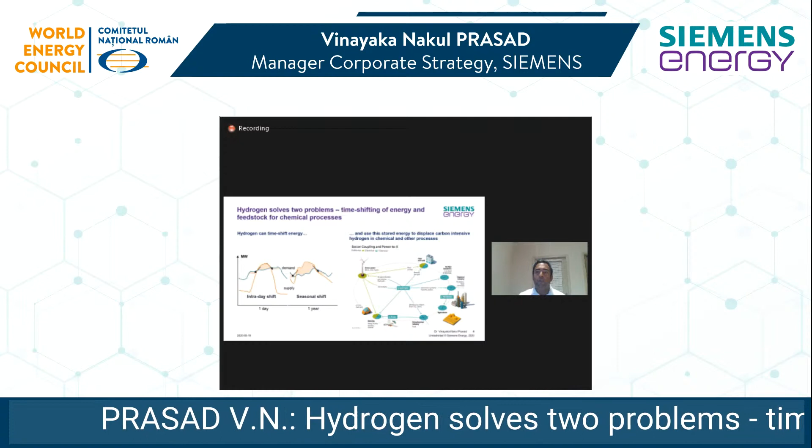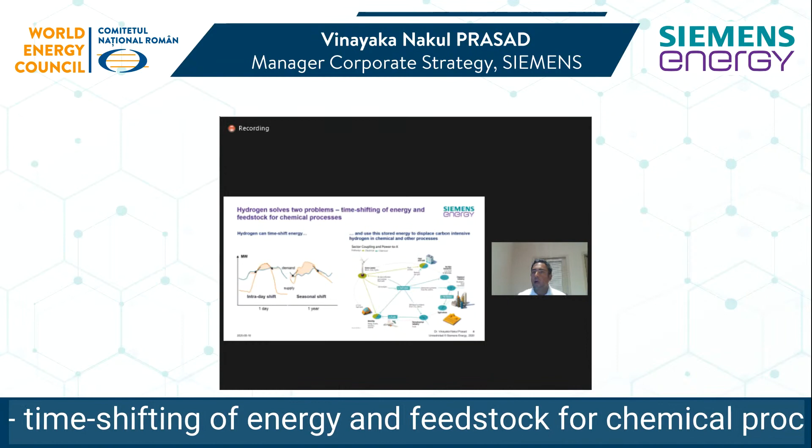And the second one is it is already a feedstock to many industrial processes. So if you look at the fertilizer industry, it's a key ingredient to produce ammonia and then ultimately fertilizers. In the oil and gas sector, it's very important to remove sulfur, for instance. And in fact, these two industries combined are the largest consumers of hydrogen. But hydrogen can also be used in heat. If we blend it with natural gas, we can use the existing grids to power furnaces, for instance, or home boilers.

Depending on the levels, of course, and the safety margins. It's used in the food industry, in the beverage industry as well. And it's starting to gain traction, and that was mentioned by the minister as well, in the mobility sector as well. So we see especially heavy-duty trucks being equipped with fuel cells now.

And we will see, and I'll talk about this a bit more later, enhanced use, I'm pretty certain, in transport, and it does not have to be only in pure form, like in fuel cells, but it could be in the form of a synthetic hydrocarbon. So if we take an external source of CO2, for instance, through direct air capture and combine it again with hydrogen, which is produced from renewables, we have this net zero hydrocarbon fuel. So we could have kerosene, for instance, methanol, and any kind of flavor.

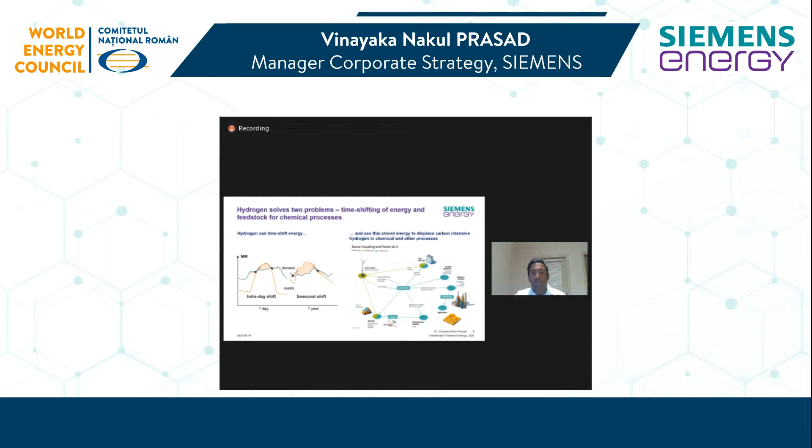And in fact, in Germany, there's a big project now coming online where 7 refineries are combining to produce large-scale hydrogen from stranded offshore wind. So that is gigawatt scale offshore wind by the North Sea, converted into hydrogen. And this is going to be then converted into kerosene used in the Hamburg airport as a transportation fuel to meet future transportation regulations. So that's just one example of how we see hydrogen unfolding, really.

And as a result, we join the chorus of different market outlooks, and particularly since it has a sector coupling capability, we believe also that the outlook from today's close to 80 million tons to close to 550 million tons by 2050 in the more optimistic scenario is something which is definitely going to happen.

Looking at the production again, the problem with the hydrogen produced today is that it's very CO2 intensive because it's using natural gas as a basis or even coal. So 95% is what we call gray hydrogen. That's taking steam methane reforming and emitting a lot of CO2. The International Energy Agency estimates about 830 million tons of CO2 emissions from hydrogen production alone per year. It may not sound that much given the close to 35 gigatons we emit every year, but this is the combined emissions of Indonesia and Great Britain, so quite substantial.

But in the future, and it's highlighted by these rainbow colors, and I'm going to talk more about the colors later on, we expect this to be more carbon-free. So we see blue hydrogen, which is a combination of gray and carbon capture, and a lot of green hydrogen from renewable energy sources. So it's going to be a mix, and it has to be a mix, really, to achieve our decarbonization targets.

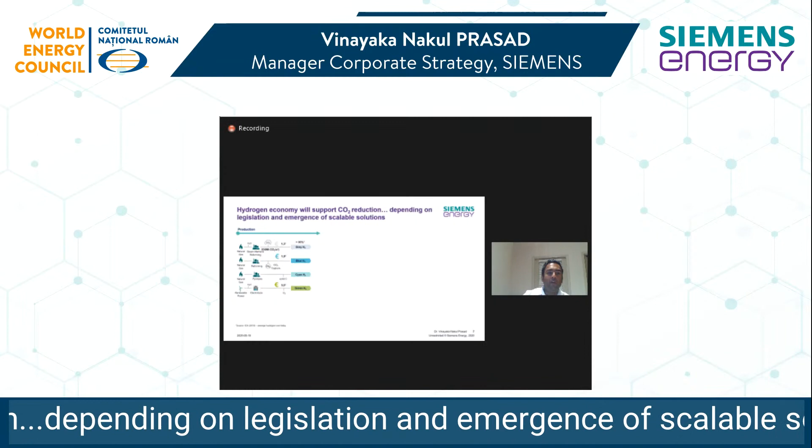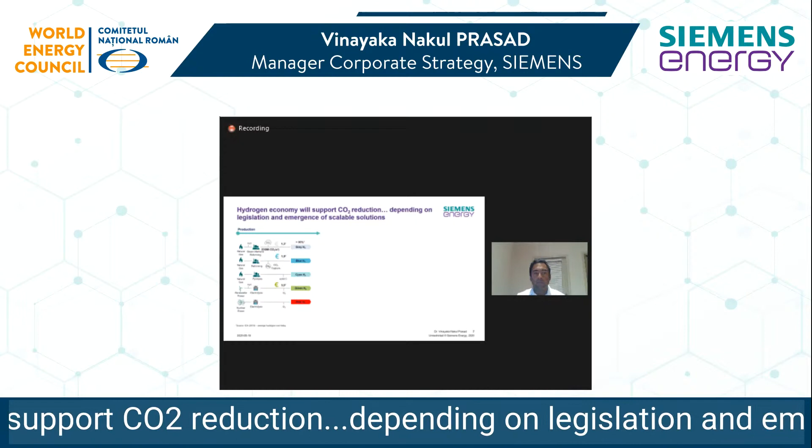We spoke about green hydrogen. Unfortunately, from a price point, on average, it's very expensive, and I'll dive a bit deeper into this price aspect later on. Another way of using electrolysis is combining with nuclear. I did a bit of research, and if it's correct, I think Romania has about 20% nuclear energy, so that is also a way to have low-cost hydrogen at larger scales. In the US, for example, a lot of nuclear plants are at risk of being stranded, so that's another opportunity to convert these nuclear power plants into large-scale, giga-scale factories of ammonia, for instance, really giving it a second life.

And finally, hydrogen has also been appearing as a waste. A lot of industrial processes in refineries, steel mills, for instance, have been emitting hydrogen along with other constituents like CO, so it's a syngas. There's two options: either you flare it, which of course is very environmentally unfriendly, or you can actually reconvert it into power. Gas turbines have been doing that quite successfully, even with higher hydrogen contents, up to 50, 60%, in the past. So you're thus converting this waste into energy, and it can be both power as well as heat.

Sorry, it's kind of taking its own life here, and converting it into heat. So really utilizing it and minimizing the CO2 footprint.

In terms of transportation, that is also a big question mark. And I think the minister mentioned initially that we need to look across the entire value chain. So it's not only production, but also how to get hydrogen from A to B. And there are various options.

We can blend it in pipelines, for instance. That could be a straightforward way. It requires a bit of upgrades of the pipelines. Because of safety issues, hydrogen is a very light element, so we have to make sure the sealings are correct. It can cause embrittlement, so the material needs to be stainless steel. But if it's done properly, this could be a very good way of using today's asset.

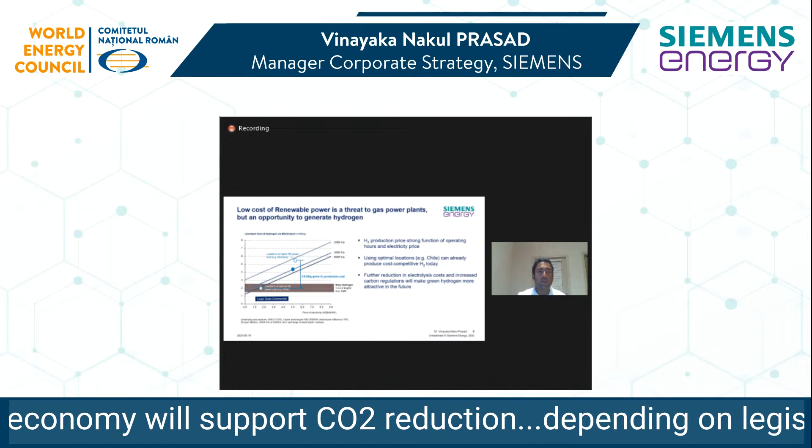So just a bit about economics. Apologies, it's probably a busy graph, but it shows where we are, where we're heading, and where the opportunities are for green hydrogen. The x-axis shows the price of electricity, in this case US cents per kilowatt hour. On the y-axis, we show the cost of production of hydrogen per kilogram using electrolysis.

And this gray bar shows the reference range for gray hydrogen, using natural gas and steam methane reforming. Depending on the prices, there's a variation, but that's your benchmark price of about $1.5 to $2.5 per kilogram hydrogen produced.

Now, this plot shows a couple of sensitivities. Of course, electricity prices are very, very important. So if we want to use green hydrogen, we need to ensure access to low-cost renewable energies, ideally free energy, especially when you curtail. And this is not always given. Particularly in Germany, there was an issue with the feed-in tariffs, so that electrolyzers essentially had to pay a premium for renewable energy, which is kind of counteracting the whole system. So ideally, you want to have free electricity. Typically, 60% of your production costs are down to electricity costs.

The other factor is the operating hours of your electrolyzer. You want to maximize your capacity, your running hours with the electrolyzer to really lower your overall life cycle costs. So the different curves here for 2,000, 4,000, and 6,000 hours show how it shifts down. And it's pretty intuitive, because the more you maximize your operating hours, the quicker you amortize your capital costs, which are still fairly high since we're at the beginning of the development curve for electrolyzers.

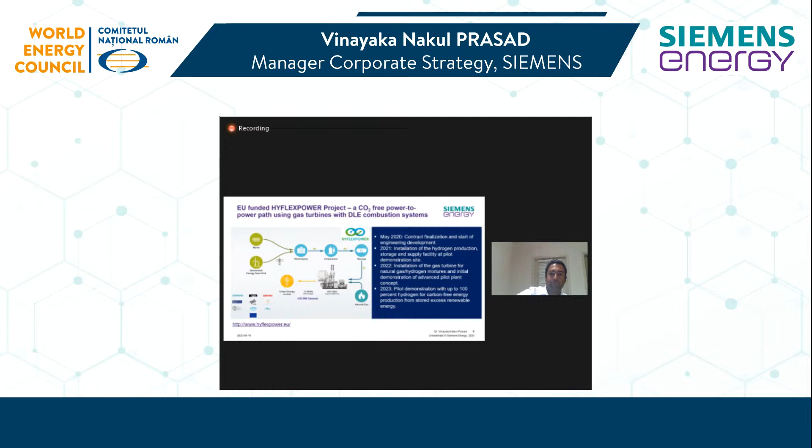Nakul, we are over the time. I apologize—if you give me one minute to wrap up. Yes, please. Thank you so much for timekeeping.

So finally, this is also my final slide. I would just briefly talk about where Siemens will really play in this hydrogen economy. We are a partner across the entire value chain, and we're going to see more examples here. It's a very exciting development, but Siemens already has a strong track record of deploying large turnkey power plant solutions, so we have strong expertise.

We provide the planning, the consultation, the financing, but we also have the components like renewable energies through Gamesa. We have the grid connection, the transmission business. We have the core business now, electrolysis, the new energy business focusing on electrolyzer technology. We have rotating equipment for compressors and so on, including gas turbines, of course.

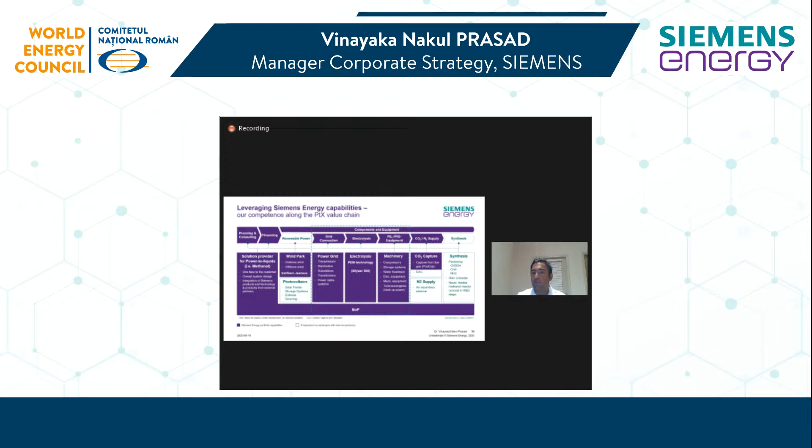All the other complex uses of hydrogen can be supported through partnering with other companies or even providing our own equipment. So really, providing the entire solution across the entire value chain—that's where Siemens wants to be, and is already, a partner, and wants to strengthen its position as partner. So really excited to have this dialogue today with all of you. Yes, thank you very much.

I apologize for overrunning, and I'll hand it back to you then. Thanks for your attention, and I'm happy to—I don't know how we're going to do with the questions, so if it's at the end now.

Many thanks, Nakul. It was a very, very interesting presentation also from my side. I hope also the audience will appreciate. For sure, we have a number of questions already. The plan is to have a Q&A at the end of this conference, I think at 12:30, if I'm not wrong. I will try to distribute these questions upfront and translate them to you in order to be able to give the answers. Okay, thank you.

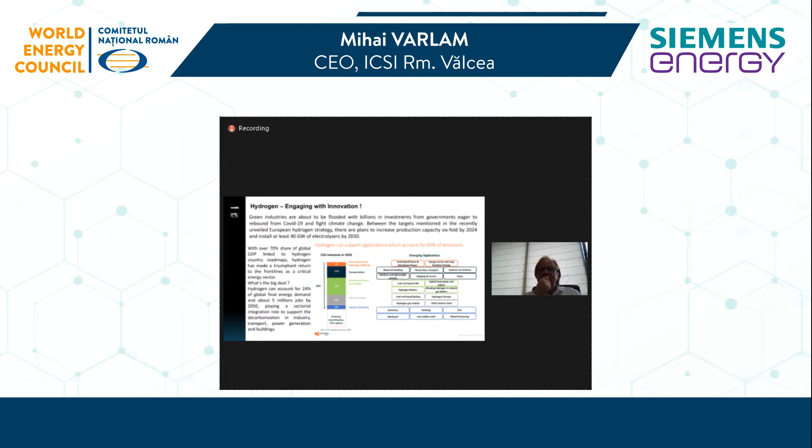The green hydrogen industry is about to be flooded now with billions in investment. There are several programs at the European level, but also from governments of the member states, trying to fight climate change, but also to rebuild the economy from the COVID situation. With over 70% share of global GDP linked to hydrogen country roadmaps, hydrogen is trying now to make a return to the front lines as a critical energy vector.

Hydrogen, as I tried to say, is an old business. It suffered from several disappointments over time. For a long time, it was supposed to be the future of energy. It was always a fascinating topic, but people were not always convinced about the commercial possibility of the technology to be implemented.

Back in 1972 was the first time the European Commission said something about the possibility of using hydrogen. At that time, it was linked with nuclear power. Of course, now with the situation of nuclear energy, things have changed. But hydrogen always remains in the front line of R&D topics. Now the time of hydrogen has begun. An official of the European Commission said the timing is right, the fundamentals are there, and we have the know-how. All we need is a bit of luck.

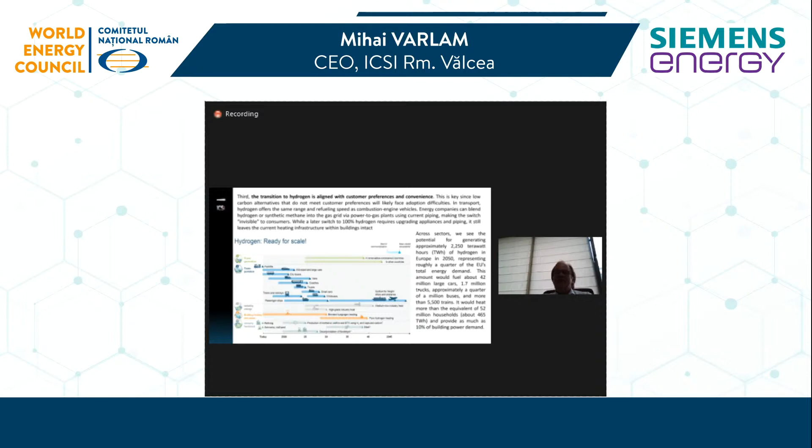There are two projects I would like to tell you something about, what we are trying to do in the next period of time. There is a pilot project to prove hydrogen technology capability to heat rural areas of about 100 houses, and it will be based on green hydrogen production and implemented in an isolated area.

The project should start at the end of this year, and there is also a memorandum of assignment by the government, the Romanian government, which proposed to build a hub of hydrogen, which should be a kind of catalyzer for development of various hydrogen-based projects in Romania.

It will gather research and development companies, academia for education, industry as companies which have interest in this kind of project, and of course the government for new standardization systems. It's a Ro hydro hub concept which will have different departments, and which will try to develop, as I told you, different challenges which still exist in these areas.

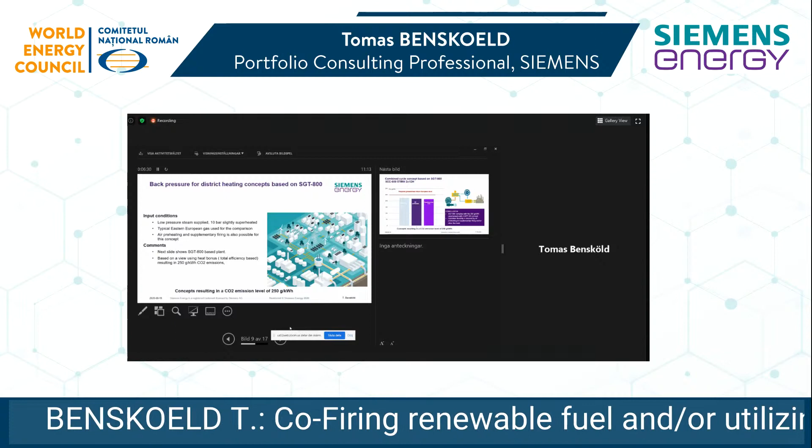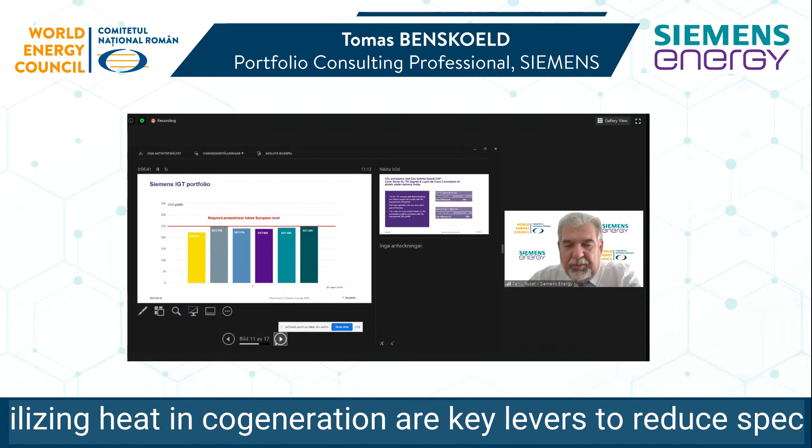So again, here we will be looking at, sorry, why can I not continue with next slide? Let's see. Maybe you have to use full screen mode in presentation. That's the problem. No, sorry, I had to just move a little thing that was on my screen.

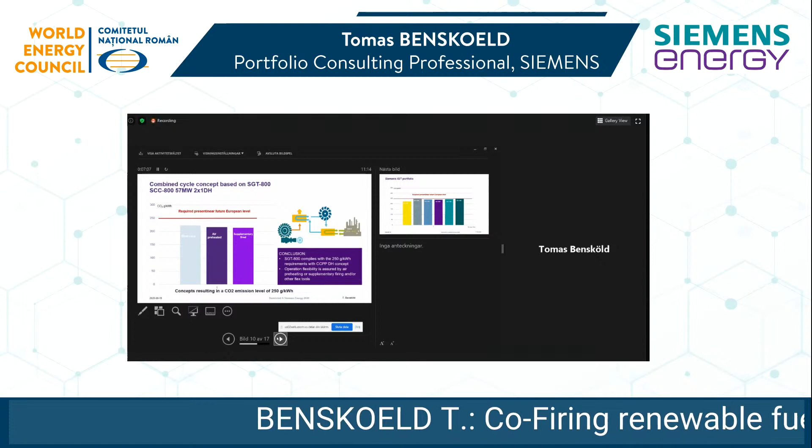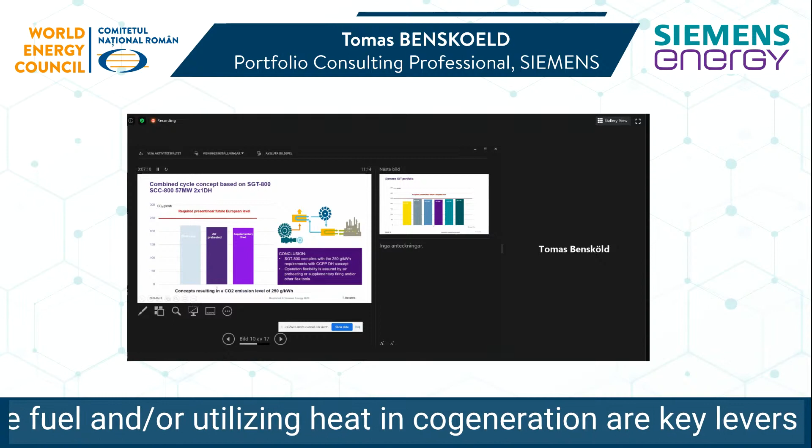So this is a combined cycle concept again, with district heating back pressure. And also with this kind of concept, we are well below levels that we see coming here in Europe in the near future. And also here we have operation flexibility possible, as I talked about before, preheated air, supplementary firing.

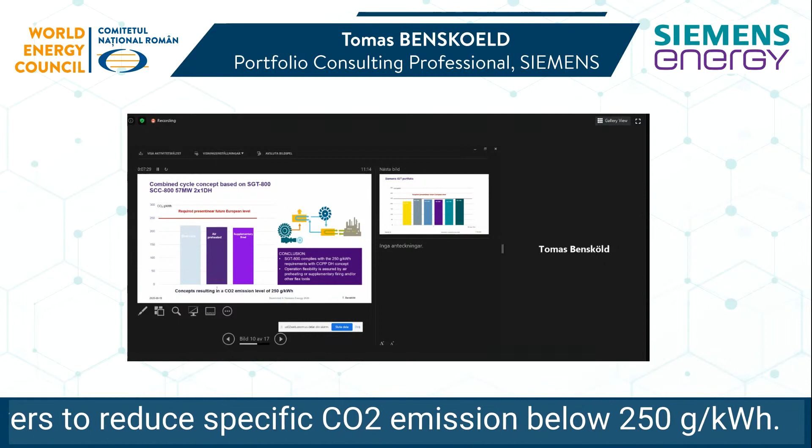But in case there is a need for power, particularly during summertime, as you know, there is not so much need for district heating water. In that case, only tap hot water will be needed. And for those cases, we can look at flexibility by using summer coolers or systems with heat accumulators.

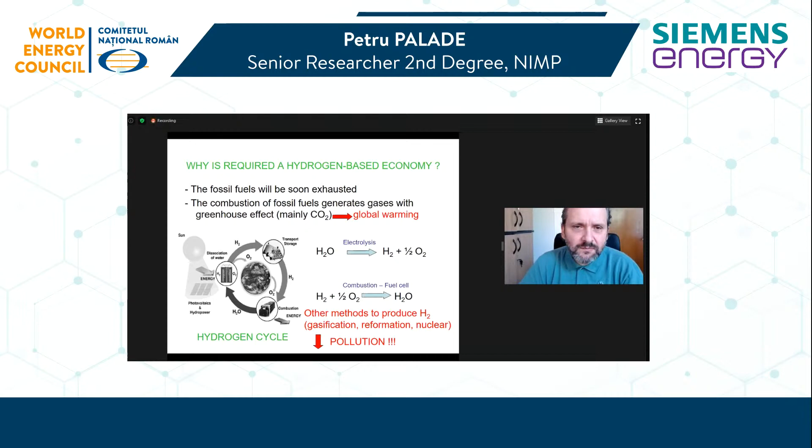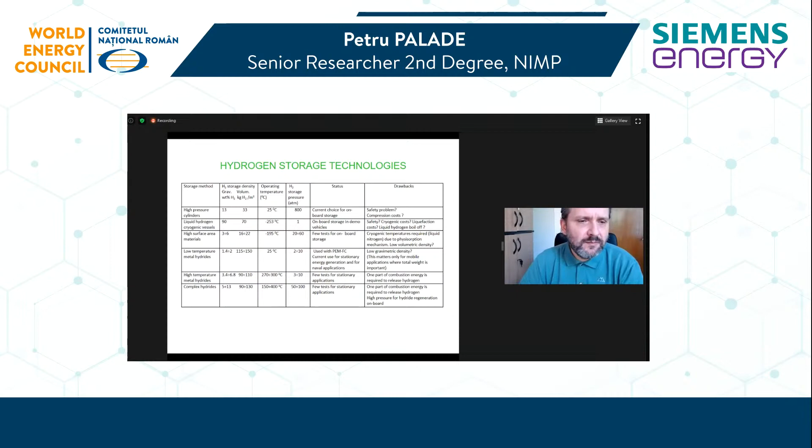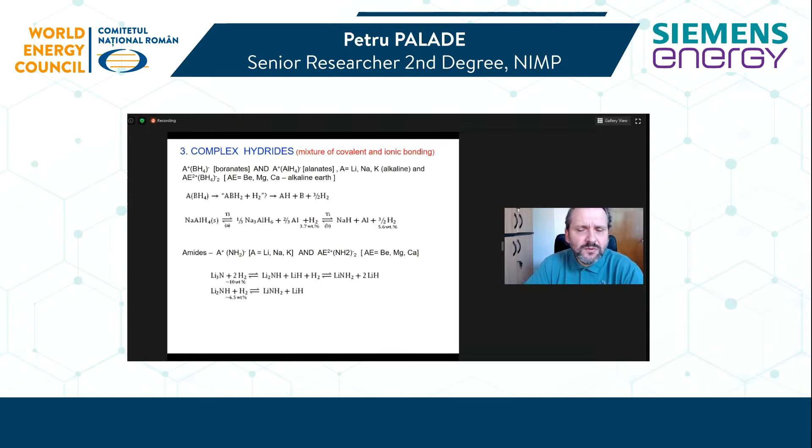So what we have to do to improve the hydrogen storage properties of the material is improve the kinetics, so the amount of hydrogen which is desorbed and absorbed versus time, to have fast kinetics. This can be done by adding catalyst or by changing the preparation route, and also to improve the thermodynamics, the plateau pressure needs to be enough, more than 1 bar, in order to feed a fuel cell with hydrogen.

For magnesium hydride, this 1 bar pressure of hydrogen can be achieved at 280 centigrade, and for lithium borohydride at 410 centigrade.

By designing a special chemical reaction for generation of hydrogen in the mixture of lithium borohydride and magnesium hydride, we can obtain a 1 bar hydrogen release pressure at 168 centigrade. This was not yet practically obtained because there are kinetic limitations, so we need to use catalysts and preparation routes to improve the kinetics in order to obtain this 1 bar pressure at 168 centigrade.

And now we present some of our results. We worked a long time on magnesium and tried various catalysts, such as niobium oxide, and tried various preparation routes, not only ball milling of the hydrides, but also starting from melt-spun ribbons which we ball mill, and after this we hydrogenate them and study the kinetics of absorption and desorption of hydrogen.

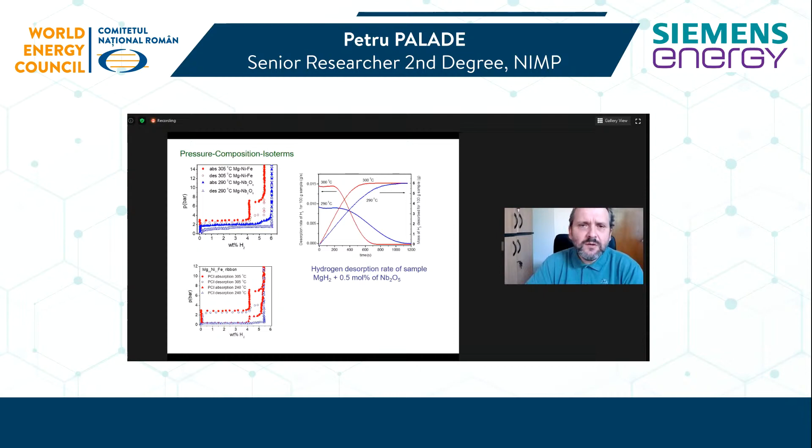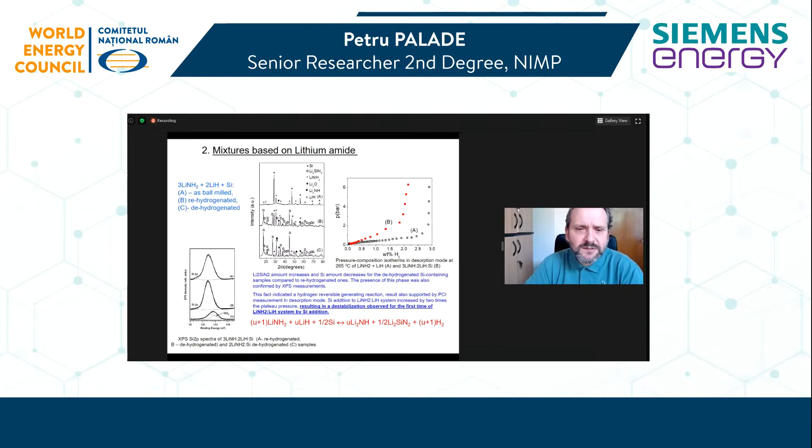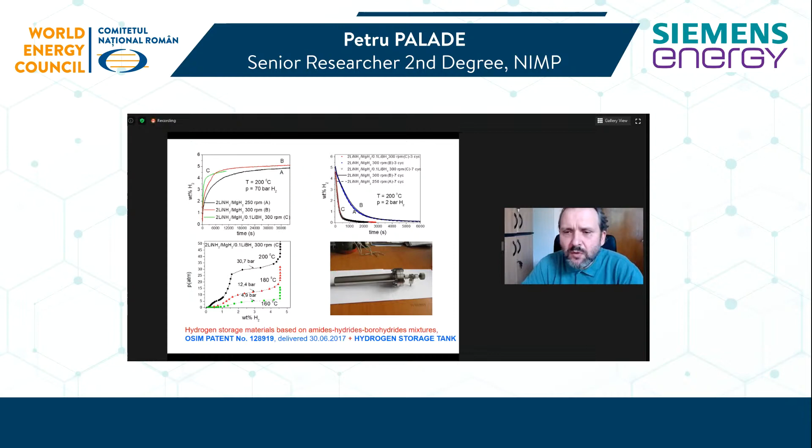This material was the subject of an OSIM national patent delivered in 2017, and we built a small hydrogen storage tank with this material.

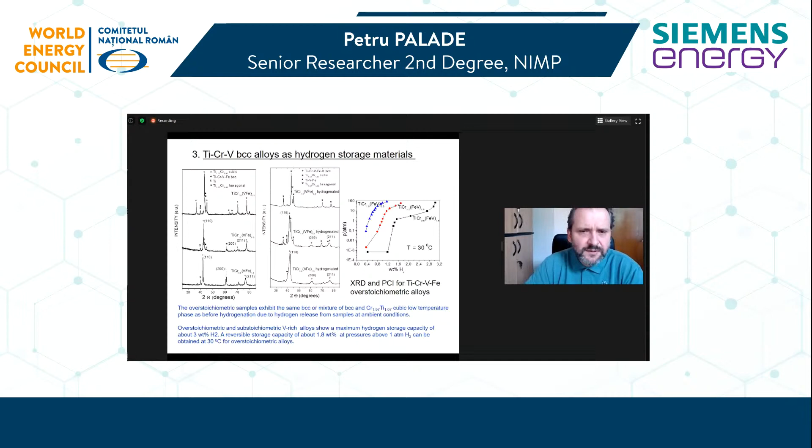So this material can be really used for feeding the PEM fuel cell with hydrogen. So the conclusion, hydrogen storage, in my opinion, is the best option for stationary energy generation and naval application. No liquefaction, no compression costs, security use, low hydrogen pressure to load, to regenerate the hydride, and also for hydrogen desorption. So below 1 bar, below 10 bars of hydrogen.

Magnesium-based new materials obtained by a complex ball milling melt spinning process have very good kinetics, but unfortunately the working temperature cannot be decreased below 280 centigrade.

First time we prove in literature thermodynamics destabilization, so the plateau pressure increase for lithium amide mixture by silicon addition, and we develop a good material with almost 5 bars at 160 centigrade and 4.6 weight% of hydrogen.

And we built a small demonstrative hydrogen storage tank, and these materials have to be improved in future, because theoretically 1 bar can be achieved at 90 centigrade. So if we overcome some kinetic limitation by some preparation routes or catalyst, this is really a very promising material for feeding the fuel cell with hydrogen.